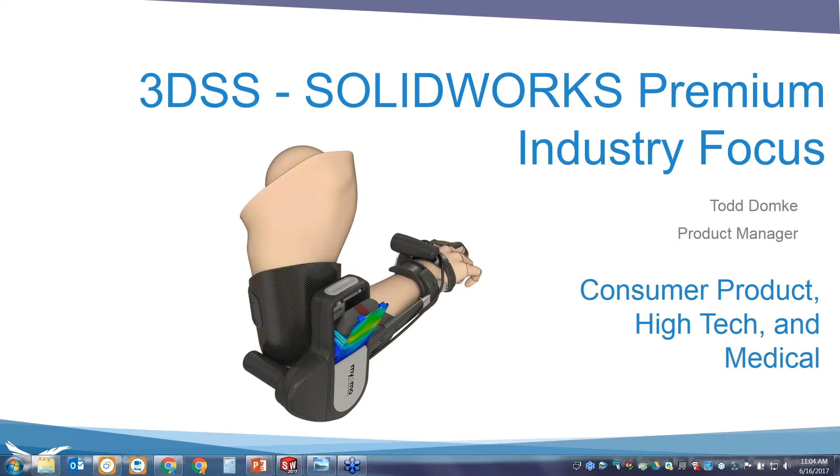You may know this month we've been doing a series of webinars on SOLIDWORKS Premium as the focus, but instead of just listing all the powerful features and productivity tools included in Premium, we're looking at it more in terms of focusing on an industry and how some of those can help you solve specific challenges for that industry. Last week we looked at aerospace, automotive, transportation, and defense, and this week we're looking at consumer products, high tech, and medical. You can go back to the June 9th webinar and get that recording on our website.

And then next week we're doing the same thing for the energy, plant and process, oil and gas, and industrial equipment industries, again looking at how the specific benefits of SOLIDWORKS productivity tools in Premium can help you do your job and get better products out a lot faster.

The reason we're focusing on Premium is because this month, at least while it lasts, is a really good chance to get SOLIDWORKS Premium, better than we've ever seen it before, for the price of SOLIDWORKS Standard. That's really all you need to know. You pay for Standard and you get SOLIDWORKS Premium. You skip SOLIDWORKS Professional and go right to the top, getting the best, most powerful version of SOLIDWORKS. You save a lot of money and get a lot of stuff.

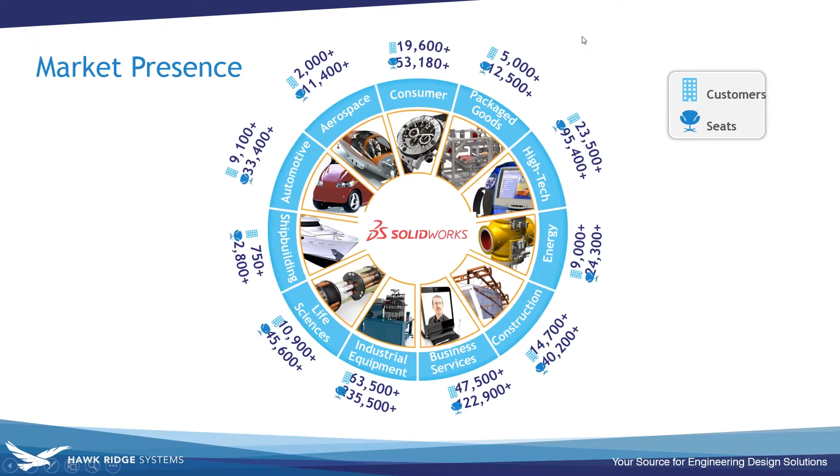Looking at consumer products, what are the specific challenges we have when working in this industry, designing products and getting them to market? There's a big human element in consumer products. Humans buy these products and they interface with these products, so therefore ergonomics and aesthetics are extremely important. Innovation is really important too. Who can come up with the next best idea for a product that helps people or brings people enjoyment? Product innovation is massive here.

There's also short product life cycles. You've got to get them to market extremely quickly, and then there may be a new one coming down the road, so they may not be on the market very long. It's constant reusing of data and improving the product.

Also, offshoring and globalization mean we need to be able to communicate with manufacturers. We may be designing this product but not making it. We may be bringing in other experts and specialists from other parts of the world to help bring this to market, so we need to communicate effectively, not just with emails and screenshots. We need something more than that.

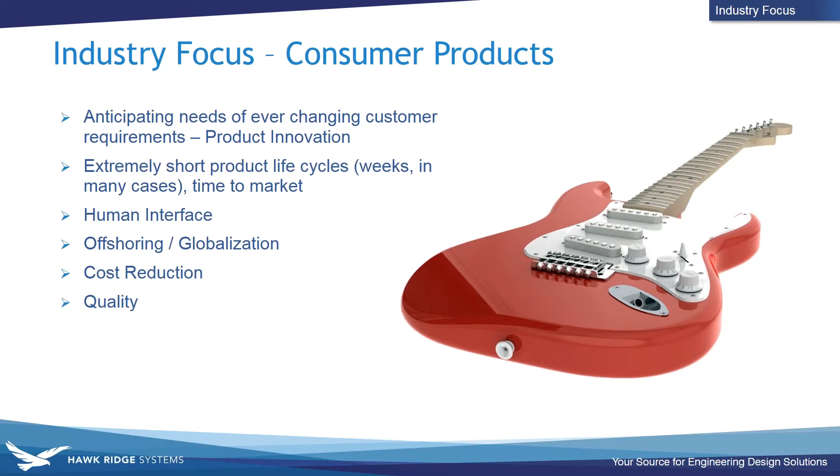Obviously, with a short product life cycle, you don't want some of these products to be too expensive, so we need to be able to develop them a lot cheaper so we can sell them for cheaper. And again, because it's such a close human interface with these products—they're in your hand, on your body—they need to have that feeling of quality because you're so close to it and you see and feel it. So we need to eliminate mistakes and make the quality as high as possible so it gives off that impression for your brand, and so they'll keep looking for you for new products.

Now the consumer products industry itself breaks out in a lot of ways. It could be anywhere from furniture—very low technology, but aesthetics very important—to home and garden, personal and leisure goods. When you get into bicycles and things like that, we need to make sure things aren't going to break; they need to be reliable and predictable. Apparel and jewelry too, and then the last segment here is consumer electronics.

Again, big aesthetics and human interface aspects to these products, but this also focuses more on products that always have some kind of integration of circuit boards or electronics—personal audio and navigation systems, PC peripherals. They all have aesthetic enclosures as well as needing functional electronics on the inside, which means working with different design disciplines and bringing it all together into one product.

Okay, so speaking of aesthetics, let's just jump into the software here. Definitely want to spend a lot of time in the software and a little bit less on the slideshow. So let's go to SOLIDWORKS.

Here's a project we did at Hawk Ridge Systems with our digital manufacturing laboratory where we're doing some 3D printing. We just wanted to scratch the itch and do a little design work to see what we could come up with on a little remote controlled helicopter.

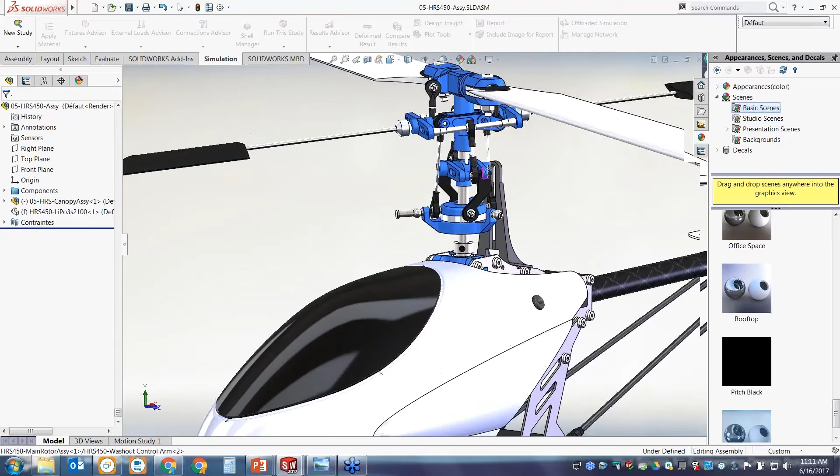Very mechanical complexity, which SOLIDWORKS can always handle. But notice the fuselage there, not many straight lines or radii or anything like that. It's a very organic, very smooth flowing shape.

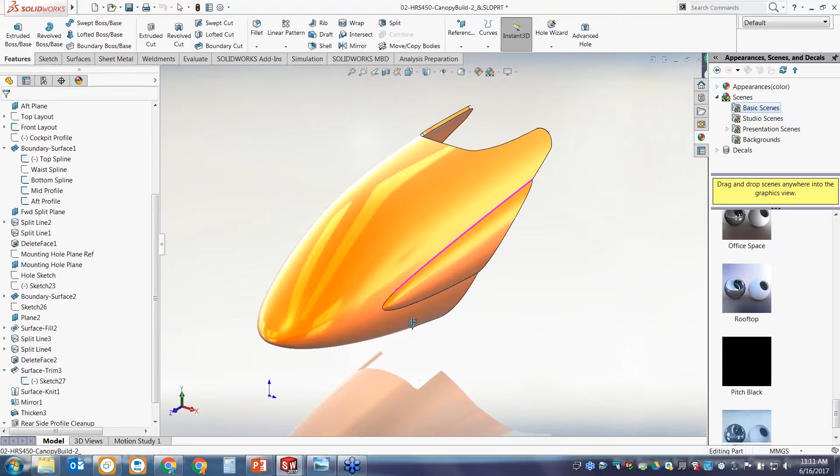So let's look at how we would make something like that in SOLIDWORKS to be able to come up with these types of shapes, aesthetic, reflect light well, and we'll look at how we can evaluate them too.

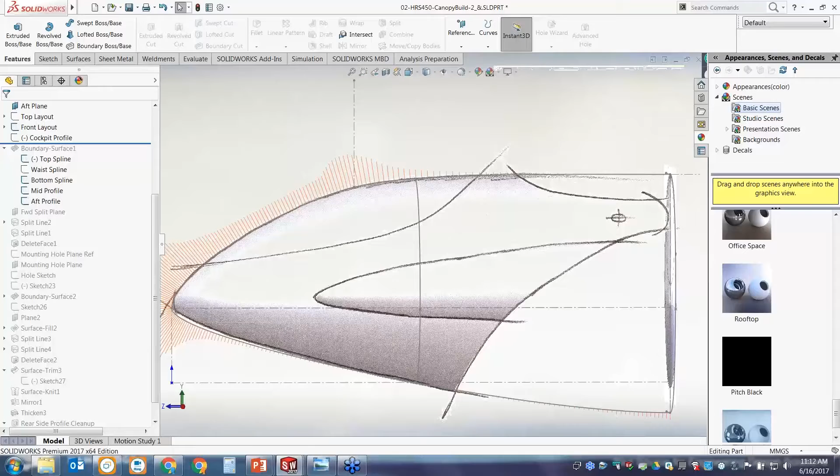If we look at our sketches here, first of all we have some artwork. So now we've placed in some artwork that we know how we want this to look, so we can use this as a reference as we build our 3D model around it. The advantage here is on the creative side, Adobe products like Illustrator, we can bring in that kind of artwork. So if you're already doing that workflow, you don't have to draw anything extra in SOLIDWORKS. You can just bring it right in and start using that to guide our building of this model.

Okay, so for this first surface, again, very smooth, nothing straight about it. How would we build that? So we have a very powerful surface feature here.

Let's just clear it out so you can see how it's created. All right, so we have our scaffolding, or our framework if you will, with several curves and splines. And we can use this curvature combs to make sure things are transitioning smoothly.

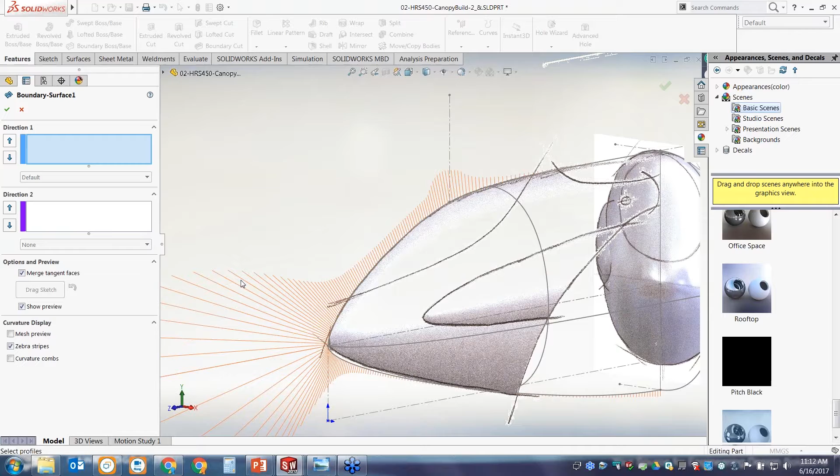I may need to look up in this area a little bit more. Again, it's not ferrying people around, it's just a small little handheld RC helicopter, so as long as it looks good in the light, it's probably okay.

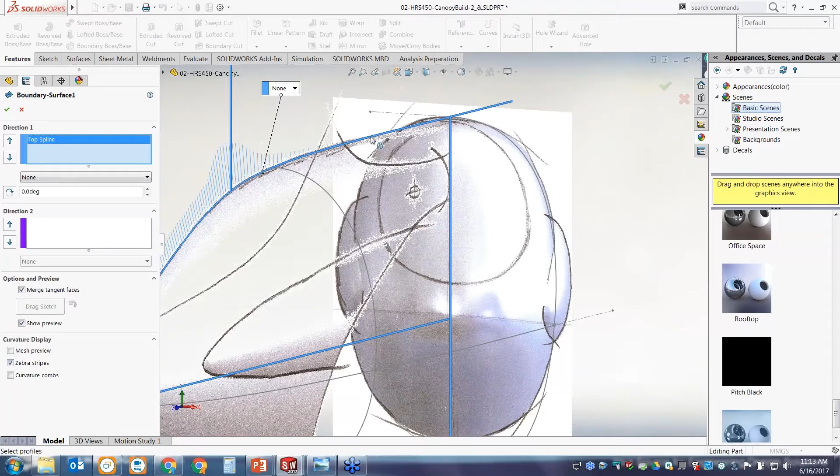But again, using the artwork and then some sketches I've created, a boundary surface works in this method where we pick a curve or a profile, and you can see that it's knitting those two together.

Okay, without any guidance right now, definitely not the shape I'm looking for yet, and we'll bring it down to this bottom one. Okay, so it's starting to take the shape.

Now in the end conditions here of these boundaries, I want to make it normal to the profile. You can see that it kind of has it come out straighter before it starts blending down now, and we're going to do that on both ends.

The middle one's fine, but on the last one we also need it to be normal to profile, because again I'm only making half of the surface, so I need a nice smooth blend over the top onto the other side when I mirror it.

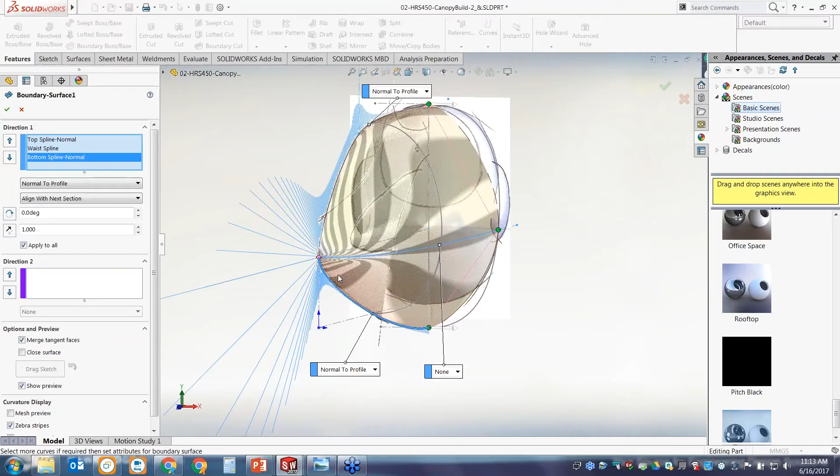Okay, so that's direction one. All of those profiles are going one direction. So now in direction two, I need this curve back here.

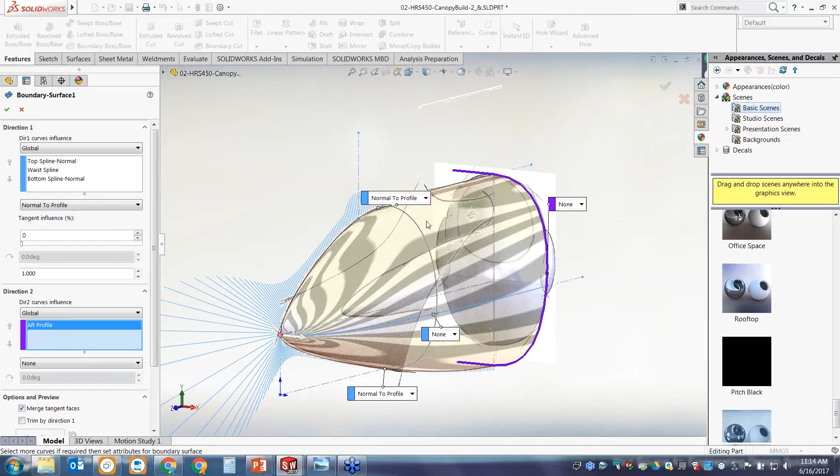And you can see that really affected the shape, and now it gets it to wrap around just the way I want it. Okay, and I have another intermediate profile here, which again further refines the shape, and now I can see the reflection plot, things are flowing nice and smoothly. It looks good. Okay, so that's our first, that's a very powerful feature, but very easy to use also.

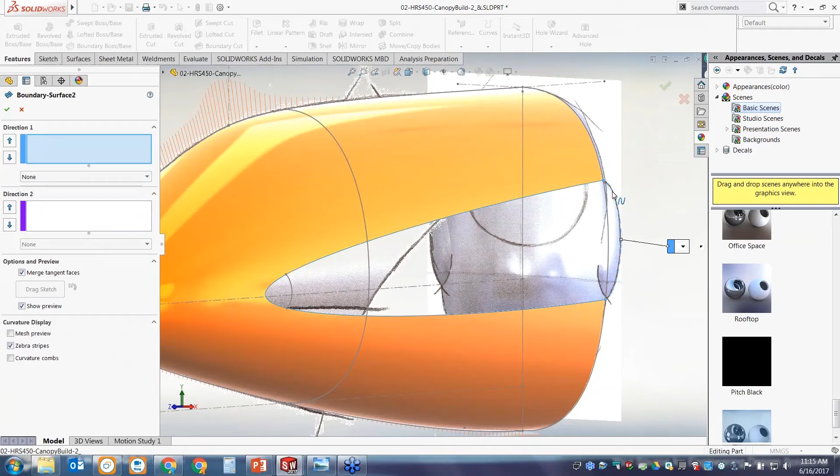Okay, and we'll come down to another area here where we need another one. Okay, so we trimmed out, we cut away a piece of this surface, and now we want to put another kind of inflection out, sticking out of that surface. And again, the way to do that would be to go from one curve to another.

All right, so you can see the shape, but it's not attached to the edges yet. So in direction two, we'll tell that to attach there. Okay, so that's looking good. All right, and you can see that feature coming off of there now.

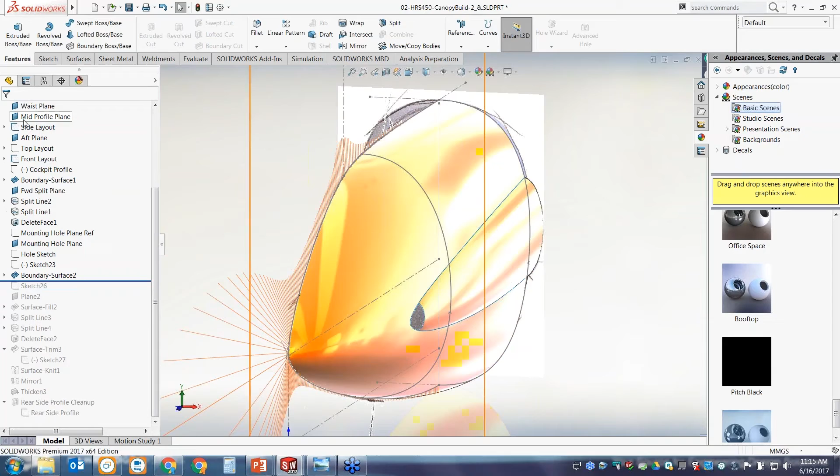All right, so that's another use of a boundary surface, and now we need to get a nice little smooth transition here in this smaller area. So we have another really powerful feature called the fill surface feature.

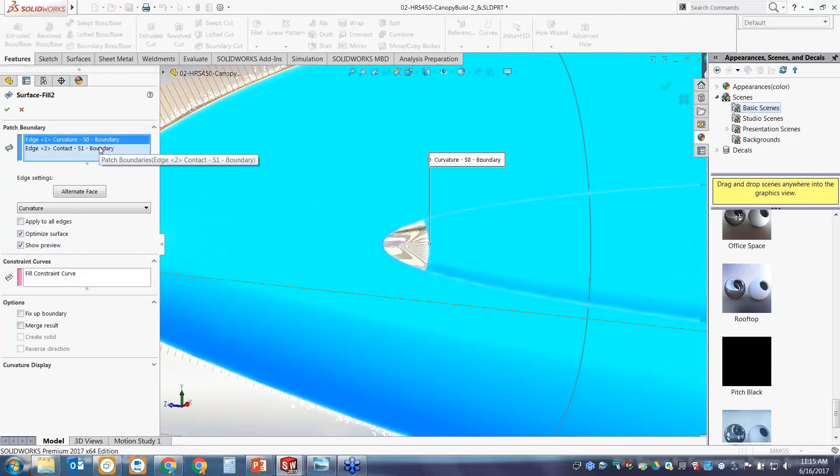All right, so this is when we just have a hole in a surface and I need to put a patch in. We'll go from this edge to this edge, and we'll look at a profile view here so we can see how this feature looks. Well, it's doing what I asked, but that is not very attractive or smooth. So where it meets this boundary, not the one on the fuselage, but the one here on this pontoon...

We'll change it so instead of just straight contact, now we want tangency. You can see how it affected that shape, and now it's flowing smoothly between this one region to the next, although it drops off a little fast. Tangency is tangency, it's mathematic. I don't have a whole lot more control over that.

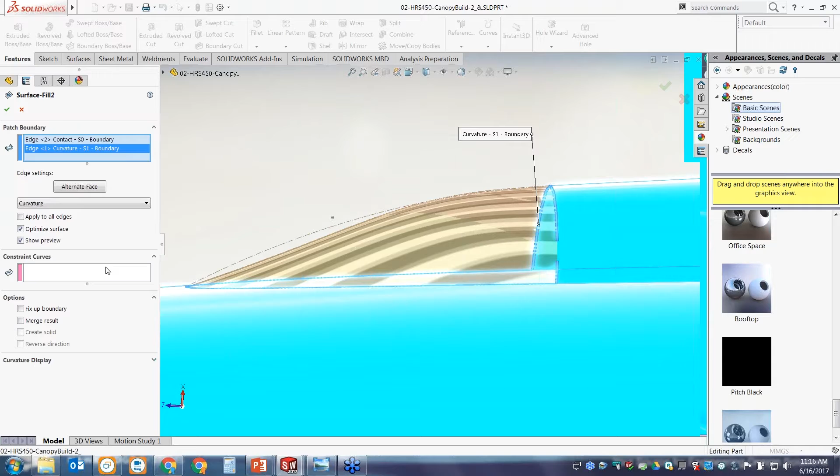So we can also do curvature continuity, which is a more advanced level of mathematics, to continue that curvature and blend it in a more smooth fashion. That's looking better. And we can go even further, because I know it's still kind of dropping off a little fast, and this is the profile I want it to take. So we can put in a sketch and put that into the equation, and now it'll maintain the curvature continuity and follow that contour going down. Powerful stuff, very easy to use.

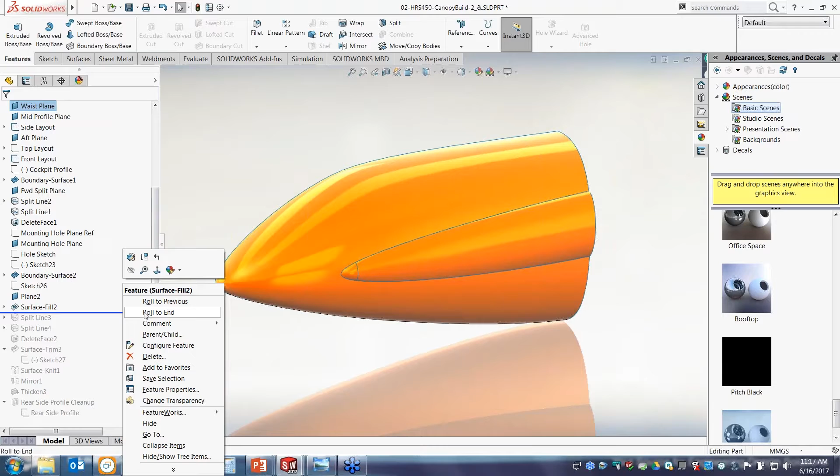And now we can look at, if we roll all the way in, we can evaluate these surfaces with some great tools built in. First one is called zebra stripes, kind of a cute name, but it's just another word for reflection plot. So we can see how this is going to look in the real world. We'll put some vertical stripes on there. We want to make sure everything's flowing smoothly. We have some other things we can do.

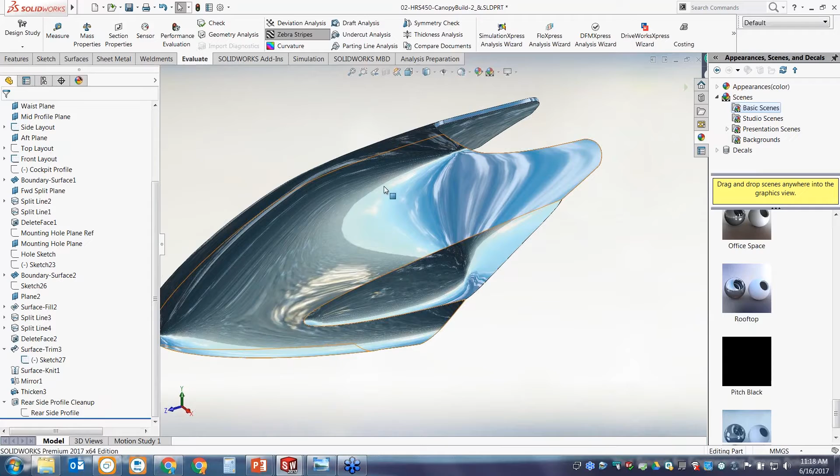We can put an image on there and see how that's flowing too. Again, we're looking for any unattractive inflections in the surface or wrinkles that I may have missed, because in real life that's not going to look very good, and that's what we're trying to avoid. So we can always evaluate what we have before we go to production, to make sure it's what we want.

So that's just a quick little glimpse into, it's a great hybrid multi-body solid surface modeler. A great combination of parametric features for the mechanical parts, great surfacing tools, boundary surface, filled surface, other tools like deform and wrap, and projecting onto complex surfaces, deform, freeform. There are several tools in here to get those really tricky shapes without having to use another piece of software. That's really the idea, we want to do it all in this. SOLIDWORKS Premium is one design solution to get you all the way there with your product.

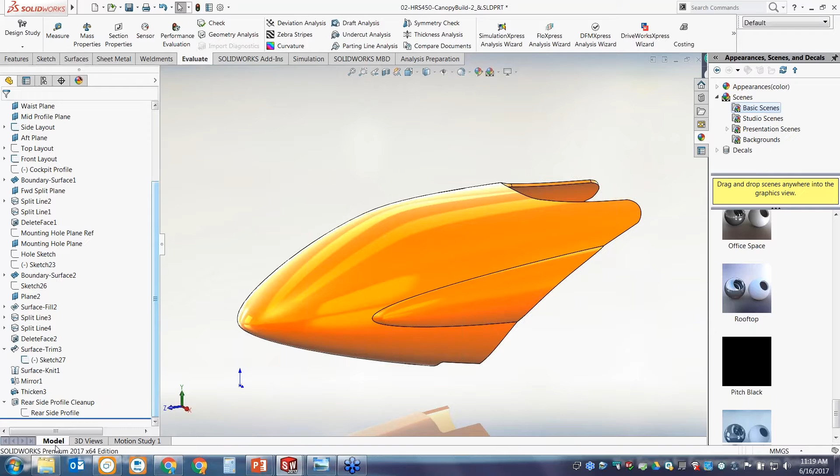All right, let's look into now, speaking of aesthetics, we also need to make sure we want to maybe try some other materials, see what it's going to look like in real life. So let's jump into how we would check that. Again, we need to check it early in the design cycle, so that we can make those aesthetic decisions early rather than later when it costs much more money and takes much more time. So we need to be evaluating this as soon as we get some models.

So let's open up SOLIDWORKS Visualize. This is a standalone product, but included in SOLIDWORKS Professional. But since you would get Premium, it's in there. You get everything in SOLIDWORKS Professional in addition to what's in SOLIDWORKS Premium. Again, it's the highest level, and it gives you everything in the lower versions as well as more.

So when I open my CAD model, let's take a look. First of all, here's what it looks like in SOLIDWORKS. I can see what it is. I think it looks pretty good, not terribly realistic, not a lot of emotion. Doesn't really make me want to have a cup of espresso right now, but again, I get a rough idea. The visualization in 3D CAD software in general is really good.

However, now it comes time to start seeing what it's going to look like under lights in different environments with different materials on it, so that we can start sourcing vendors and materials and start planning early in the design phase what this thing is going to look like. So looking at it in 3D CAD is not going to do it for us. So we open our native SOLIDWORKS model right into SOLIDWORKS Visualize. Again, it uses NVIDIA ray tracing technology, so it's as good as you can get, absolute photographic quality.

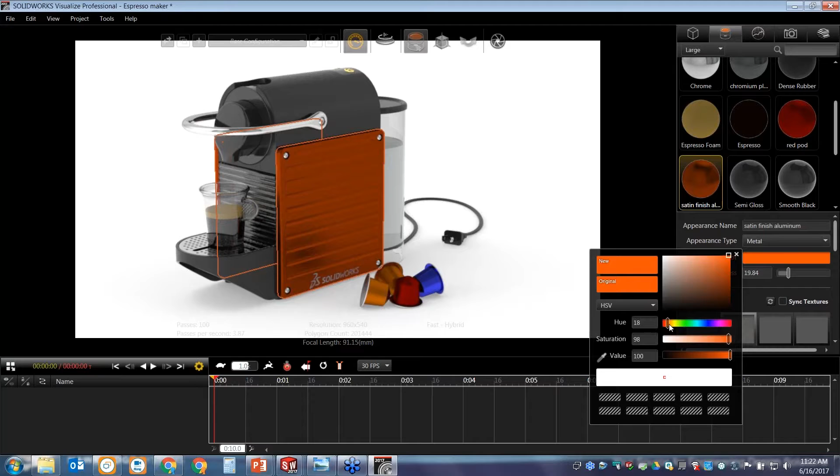Okay, so what we can do is just start trying different colors. First of all, I can select this and start looking at different properties. We can just go right to the color and change that. What if we want to try a little bit of green or teal maybe?

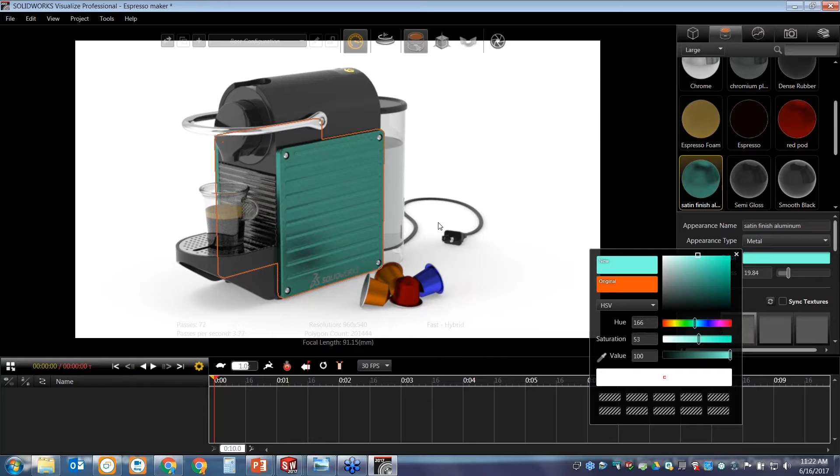Okay, that looks pretty good. Right away we see reflections on it, we can see how things look. You can experiment here all day long rather than having to make these parts and have them photographed. The workflow is like a photographer would do: set up your scene, apply your materials, set up your cameras, and then take your shots.

Okay, if we want to take up the roughness, or reduce and make it smoother, you'll see we'll get a much more accurate reflection in the face here. Maybe we want a little more matte. Again, instantaneously on the screen it's going to render it, and I'm going to see the difference, so I can start making these decisions.

Let's turn down that color a little bit. Okay.

Then we'll go to our scene. We can drag in several different scenes. There's a cloud library you're entitled to, as well as you can put in your own. And you can see when we bring in an environment, it's going to change where the lighting's coming from, the environment that's reflecting onto the model.

Okay, so we just want like a photographic studio here. All right, that looks good.

And now in the scene, I can also change things, background color and the brightness. All of that can be adjusted exactly the way you want it to make sure you're getting what you want without having to hire a photographer. Sorry, photographers.

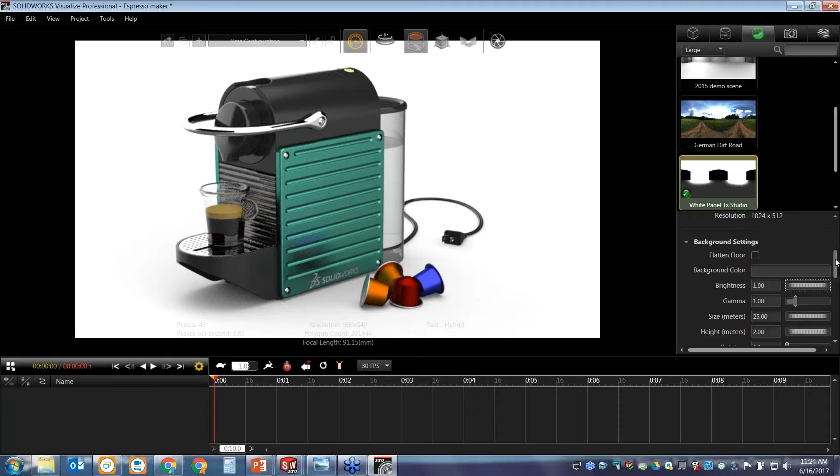All right, that's looking good. Now maybe we would want a camera. Okay, we have one camera on there so far. Maybe we'll put a few because we want several different views, because we want to draw the viewer's eye to certain aspects of the model.

Okay, and there are some post-processing options that really add some emotion and drama to the picture, and you can see how that, by darkening the outside, that vignette effect there, it really draws your eye right to the product and makes you focus on it.

Let's lighten it up a little more. All right, that looks good. Okay, and now we'll copy this and let's do another camera.

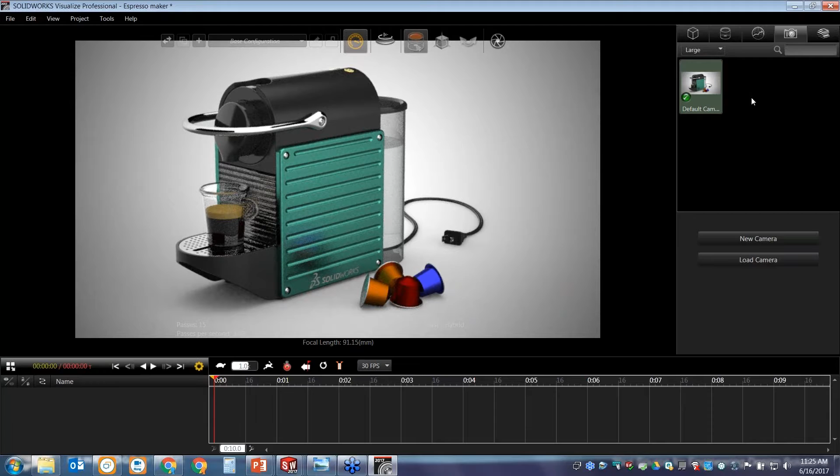Okay, and with this one, we really want to maybe focus on a certain aspect of the model. You notice again, it's rendering real time at all times while I'm doing this, so I always know what things are going to look like.

We can also turn on things like a depth of field. Okay, and now when I just tell it what I want the camera to focus on, that will come into focus and everything else will blur out a little bit. So again, it's kind of my way of forcing the viewer to focus on a certain aspect of the design.

And I can just easily change that. Now we'll go to the drip tray and you can see how that affects it. So now the cup of coffee or espresso is in focus while everything else blurs out a little bit. There's some really high quality effects here that we can use to show this thing off before it's ever produced, before we even have a prototype. We already know what it's going to look like and are making these important decisions early.

Okay, now this is Visualize Standard, which is what's included in SOLIDWORKS Professional. However, if you need different types of outputs, you're going to get the highest quality photographic static outputs from Visualize Standard. If you need more things like special effects and animation, moving, more dynamic outputs, I guess you could call it, there is Visualize Professional. So just know there are two versions of it.

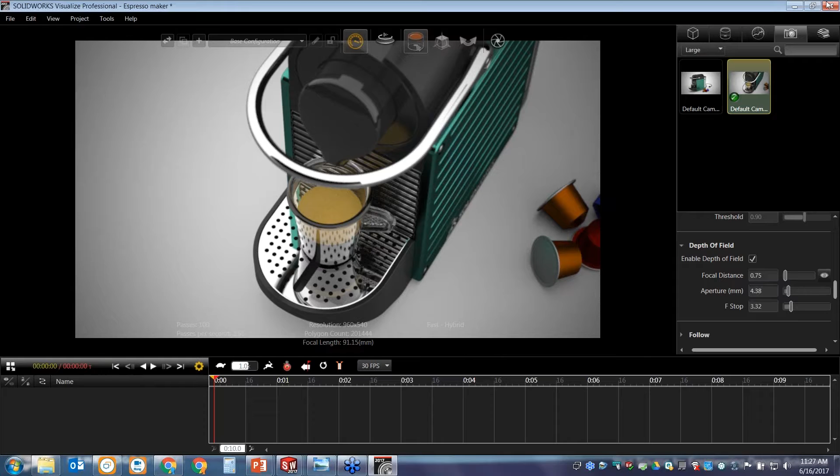You're going to get the standard one with SOLIDWORKS Professional, or Premium too. And then if you need more, there are options to go much further in your visualization, they want to make sure you have just what you need and not more. Just be aware of that. All right. Oh yeah, compared to that, night and day.

All right, one last thing here. We're talking about product reliability and predictability, especially on things that are going to be in a rougher environment. But with consumer products, there can be lots of different environments. So we have lots of customers who are bicycle accessory or full-blown bicycle manufacturers.

And we can't have stuff breaking. So how would that work here? With SOLIDWORKS simulation, we can go in and do some virtual testing so we know ahead of time if we need to make design changes before we make a prototype. We don't want to make a prototype, find out the mistakes, and then make another prototype. We're trying to figure out those mistakes as early as possible, when we just have 3D models and haven't spent a lot of money on prototypes yet.

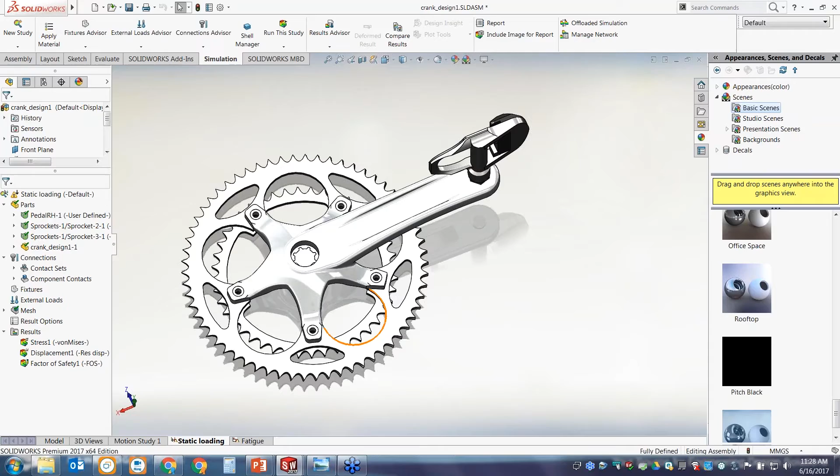Okay, so the way this would set up, let's do a simple one here. This is a pedal and a crank and sprocket assembly. They want to go worst case scenario — what if we get someone really big and strong with a really big power stroke? We need it to be light, but not too light, obviously. We can't have these things breaking, so we need to know up front if our shape is correct for the loads it's going to be seeing.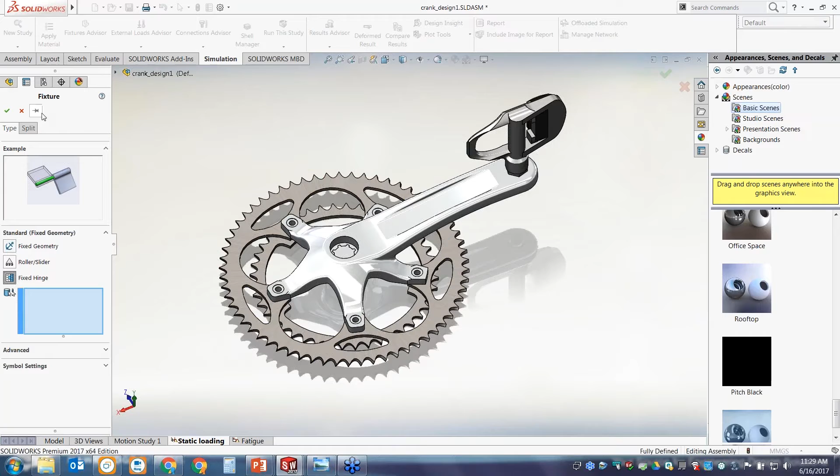So the way we would set this up — we'll do a pretty simple one here, but you can get even more advanced. We need to restrain where the fasteners would hold the crank to the sprocket, and we also need to do this hub here. So we're just telling it that can't move, which is the way it would be in its operating environment. Okay, so it's restrained accurately.

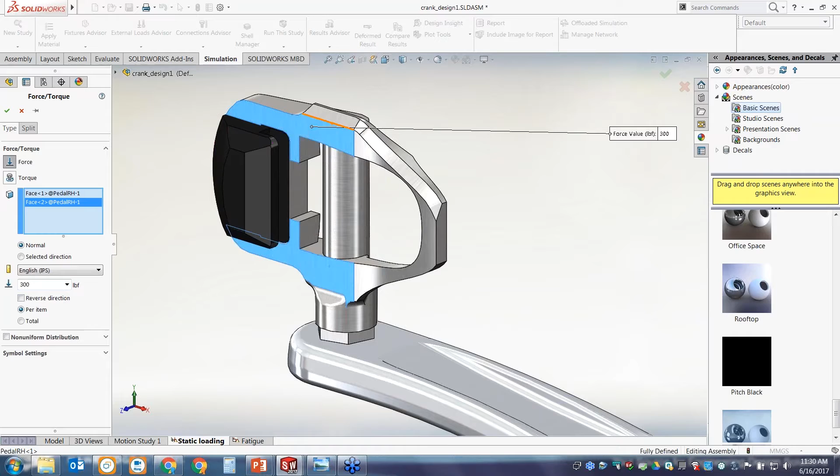Now we need to apply a force, or else what are we doing here? All right, so let's do 300 pound-force, and it's going to be applied right on these two faces of the pedal, normal to it — worst case scenario, straight down on it. We're going to spread it out over both faces, so that's the total force on all those faces. All right, so we have a load, we are restrained so it can't go flying off into space, and now we just need to run the study.

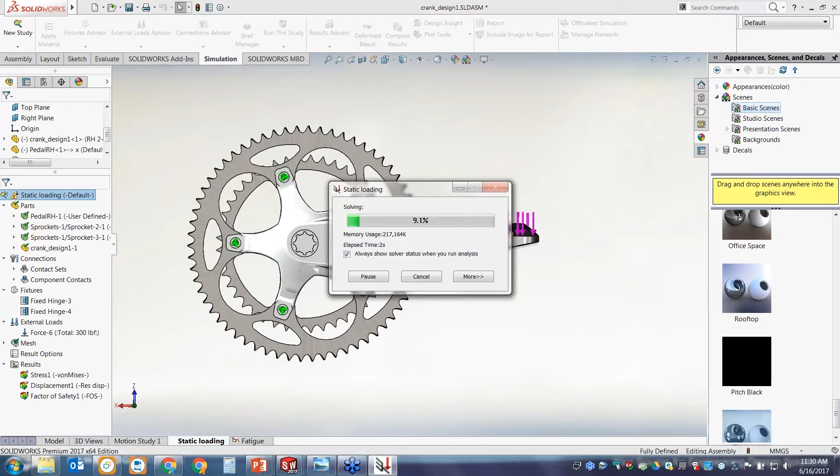And this is what computers are for. They're crunching tens of thousands of equations right now to figure out what's going to happen when this load is applied to this 3D model. And right away we get a stress plot. Okay, looks like the worst thing in there is almost about 40 KSI.

Okay, so we would compare that now. This crank is made of 6061 heat-treated aluminum, so we would want to compare that to the yield strength of that material. We also get a lot of deformation there — we can see it's going to cause a twist in the crank, which we would expect. It's obviously not going to be that much; the deformation scale is exaggerated because if it's very small, you may not notice it. So they really want you to be able to visualize it.

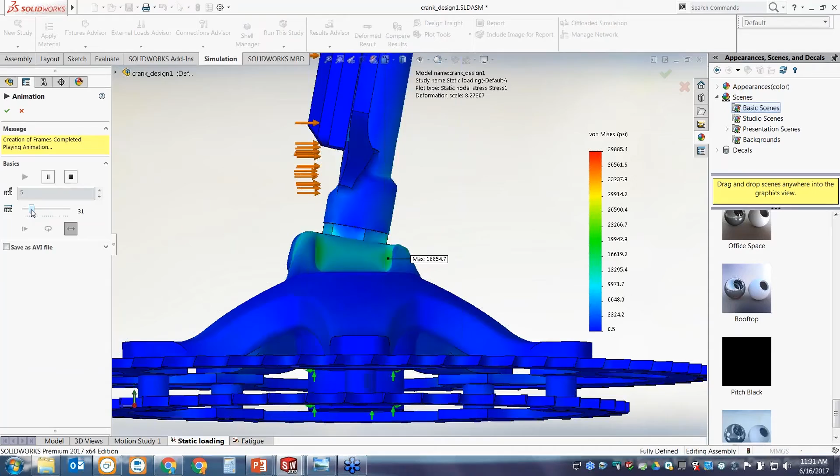And then we can animate that so we can really see how it moves and how that stress builds up. Great insight into your model. We can get some other plots, like a displacement — maybe it's not breaking, but it is going to flex. We need to know how much. So it looks like about 0.16 inches. For other products, maybe you just want to know it's going to move that much, and we don't want to have anything too close to it, even though it's not failing. So again, some great insight into your product.

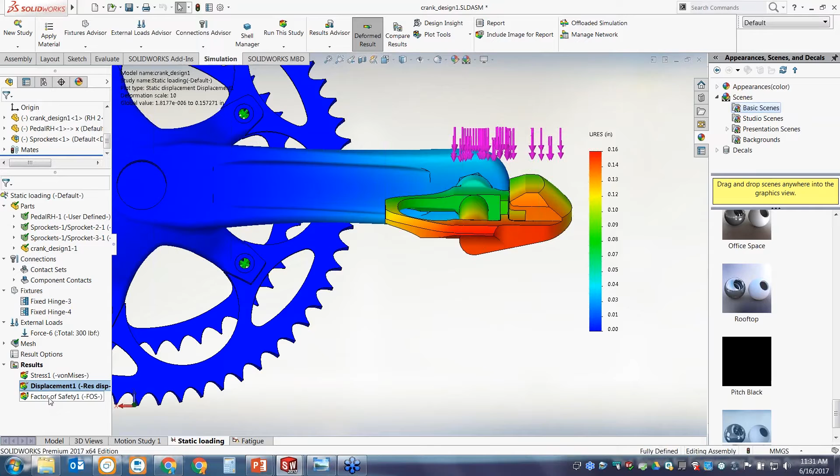And the last one here, this is what's going to really tell us something — a factor of safety plot. Right away I want to know, what's the minimum? Hopefully it's not less than 1. Unfortunately, though, it's really close to 1. So no, it's not failing after one stroke, however, that's really close, and so we might want to look at beefing it up a little bit.

What's nice about SOLIDWORKS simulation is that you get the linear static stress testing in SOLIDWORKS Premium, but you can always upgrade your simulation to do much more complex tests like drop tests, vibrations, non-linear for your plastic parts. Fatigue would be one I would do here — now that we have the load, I would want to repeat that over several thousands of cycles to see if we're going to have issues down the road. And that's something that can also be done with the higher levels of simulation.

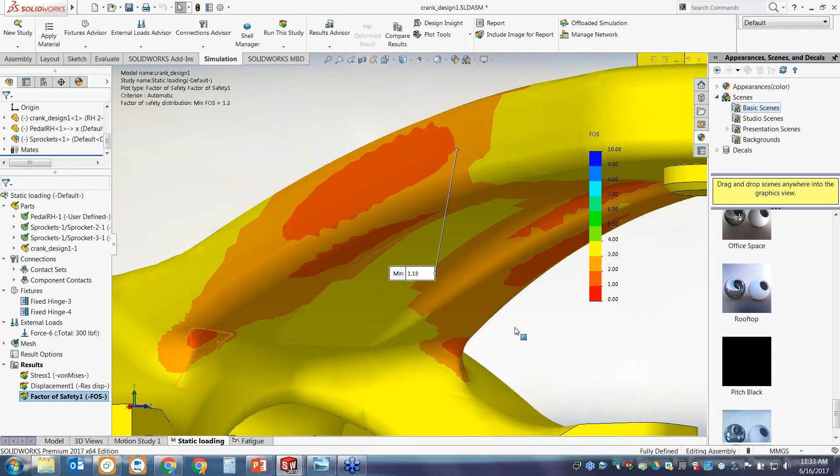So again, you can always find how you can improve your product early on. A great plot here tells us everything is yellow mostly, so we're in about the 3 to 4, which makes me very happy. However, right there in the crank, we might have removed a little too much material, so at least I know now. Maybe I'll add a little bit back in and run another study and see how that improves it — is it worth the increased weight, or do we need to look at some other things? Maybe I can beef up these fillets down here, just put a little more material in there. But again, really nice insight into the model, so I know I can start making some design decisions very, very early. And that's really what the key is here.

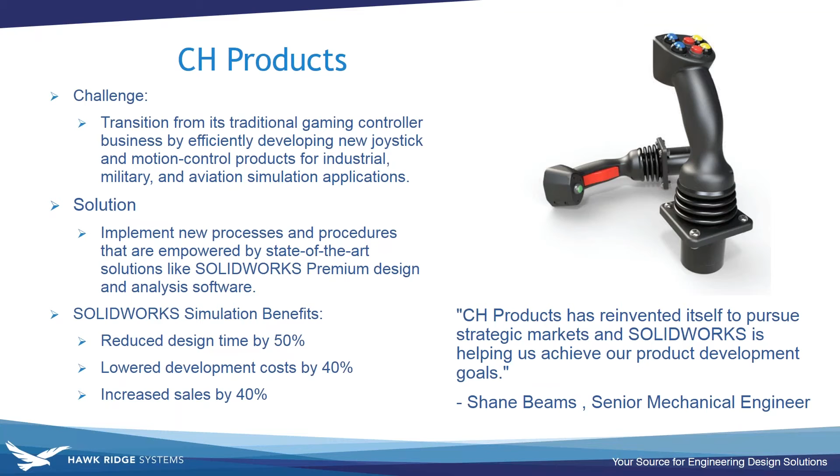So now the high-tech industry is kind of a sub-industry, or we're treating it here because, again, we only got three Fridays to do this and not 12, one for every industry. Grouping these together because, again, the challenges are very, very similar, if not almost the same. In high tech, again, we're talking more consumer electronics, so still handheld devices, however, with electronics.

Okay, some trends we're seeing here: lots of packaging is getting much more dense, things are becoming smaller. As things get smaller, cooling becomes more of a problem, so that's where SOLIDWORKS simulation, again at the higher levels, can do fluid flow testing as well as electronic cooling.

Always a focus on aesthetics and the short design life cycle again. And we're seeing things, as they get smaller and smaller, in wearable technology now. With a short life cycle, we need to pay attention to not only what materials are used, what manufacturing methods and shipping methods are used to get the product out there, but what happens to it at the end of its life. Knowing that early on may help us make some different material or manufacturing choices to help reduce the impact on the environment.

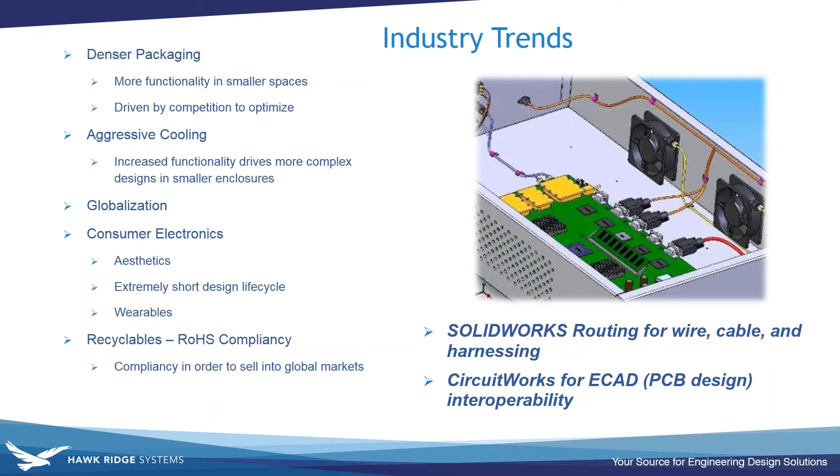We need that in our mechanical assembly so we can do some checks early on. Again, we need to find out if there's problems early rather than after we're making a prototype. So let's look at CircuitWorks. How does that work?

So again, CircuitWorks is going to allow us to bring in ECAD files through a neutral format. It's going to allow us to prepare it, and then it's going to help us build a 3D assembly of that circuit board, which is what we need to do all these checks we're talking about in our assembly.

All right, so it starts with, we're just going to open an ECAD file, which right off the bat used to be a big problem. So we can now open these types of files.

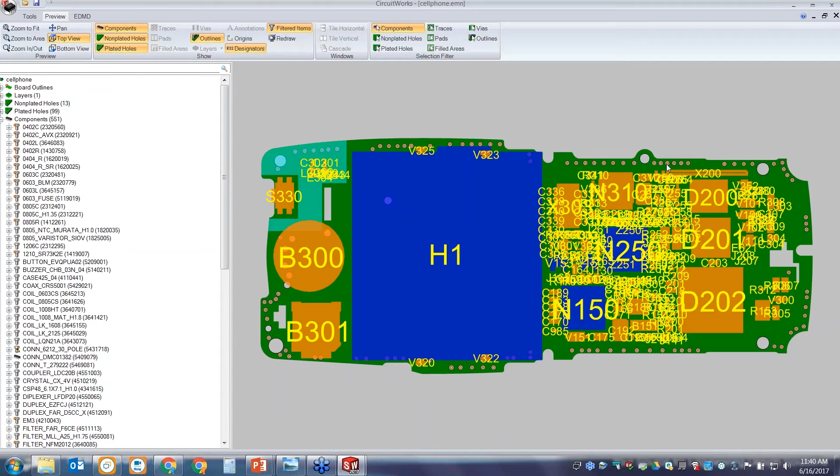Okay, it's an EMN file. Now, this is not the model. This is CircuitWorks previewing the file and allowing us to prepare it before we bring it into our 3D assembly, into our SolidWorks assembly.

So again, you can see we've got a full preview of the model, designators, all components, holes, plated holes, the board, everything is there, and we control what we want to see. If we don't need the designators right now, we can just turn those off. We don't need to see those. We can see the bottom of the board. Okay, so this board has components on both sides.

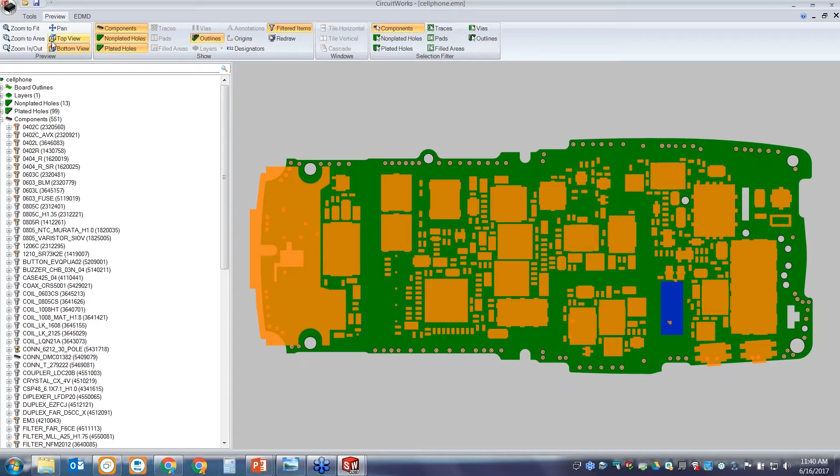We can also filter out vias and traces and other things in there. But again, we're just looking at it and telling it how we want to bring this model in right now. Okay, outlines like a keep out area here, this green top corner.

All right, so before we get ready, let's filter out. First of all, as you can see, there's zillions of tiny transistors. Okay, that is really important for the circuit board designer. It's not that important for me in my assembly. I don't need all 10,000 of those tiny little components that aren't that relevant to what I'm doing. I'll probably need most of the big ones, but I really don't need every tiny one.

So a nice way to help performance and to just unclutter the model is I can filter out components based on different parameters. This one I'll go just everything that's shorter than 1 millimeter. That's a really small component.

And as soon as I enter that value, you can see the preview changes and they kind of ghost out all those really small, more insignificant components. So those will not be built in the 3D model, which is what I want. I don't need all those.

Maybe outline, I don't need the keep out area too. Okay, so now that's gone. But that could come in as a model, so then I know I cannot have any of my enclosure in that area. So again, it's a great way to see that information and use it regardless of which design discipline you're in.

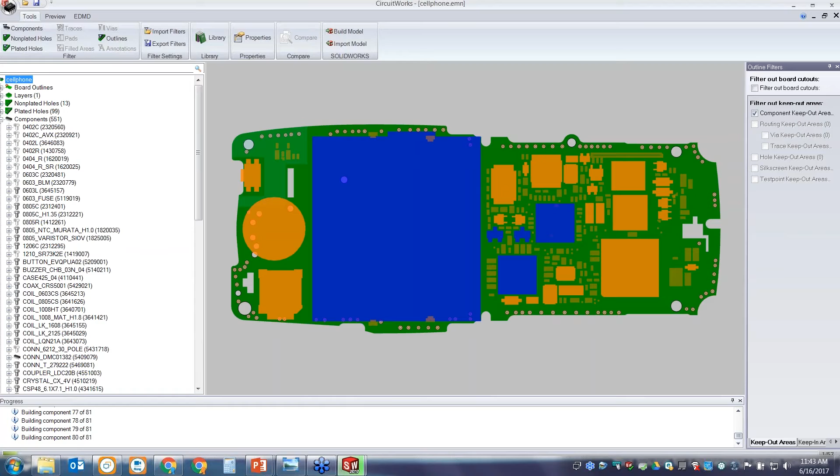Some other advantages with this are that once we have this 3D assembly, okay, so with the board component and the display component and the battery component and the chips, they're all actual individual components that are built. And now it's building it in SolidWorks.

So some advantages here, I'm now going to have an accurate 3D assembly which has mass and volume, individual components which can be moved around,

and there it is. So it just took an ECAD file from Altium or some other PCB design program, and then now I have, from there, I have a 3D assembly in SolidWorks.

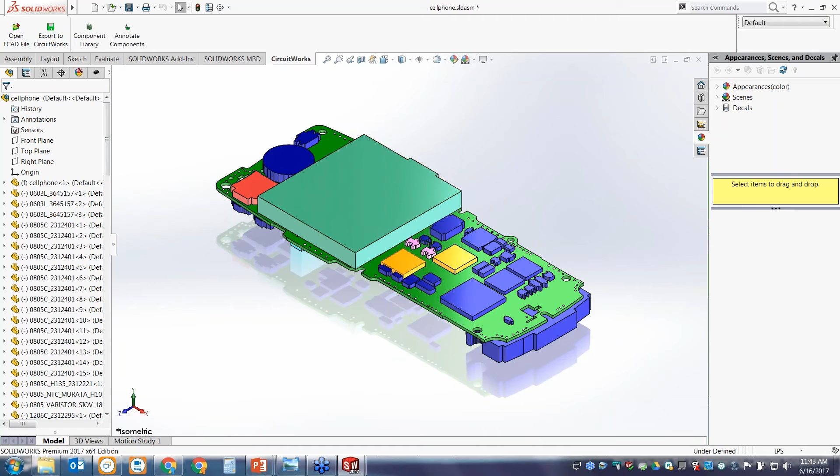And now this can be mated into my enclosure to check for fit and finish. An advantage of having individual components is now with simulation, I can put a heat power source on the chips, and then I can see how things heat up, make sure we're not too tight, make sure we have adequate cooling. Okay, that's really hard to do without this.

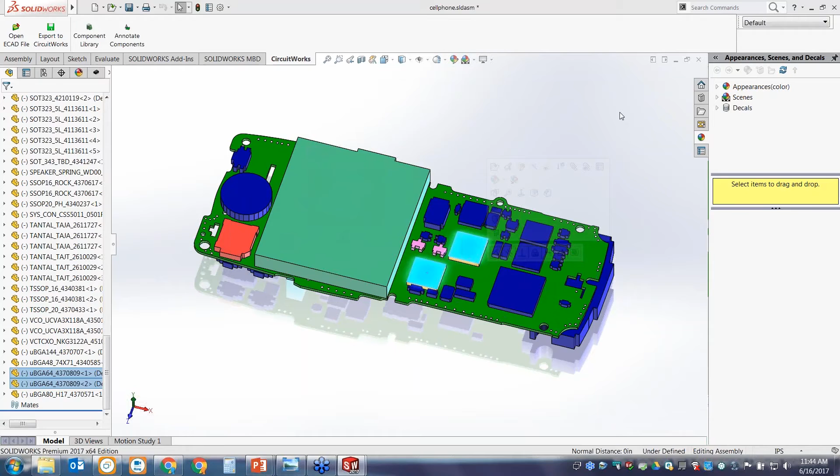Another thing we can do is, again, consult your PCB designer before you do any of this, but if we wanted to, I can delete those components. And now I can take another component and move it around.

Okay, just to give you an idea. Let's say because of the design, aesthetic requirements or some kind of requirement on the enclosure, this component has to be moved over here, and I want to convey that to the board designer. Okay, instead of a screenshot and scribbling notes, I want to be able to show them that.

So with this, I can make the change to the SolidWorks assembly, and then when I export it back to CircuitWorks, I've got a nice comparison here. Let's turn the designators on so we can see those.

There we are. You can see that B300, the buzzer, has definitely moved from version 1 to my new version. Now I'm sending an IDF file from SOLIDWORKS back out through CircuitWorks and back to the circuit board designer so they can see that information and see what changes are necessary.

It's not just about allowing you to open a circuit board. Standard SOLIDWORKS can do that. It'll create the board as one single part so you can check your fit and finish. But if you want to do more advanced things, it's not going to get you there.

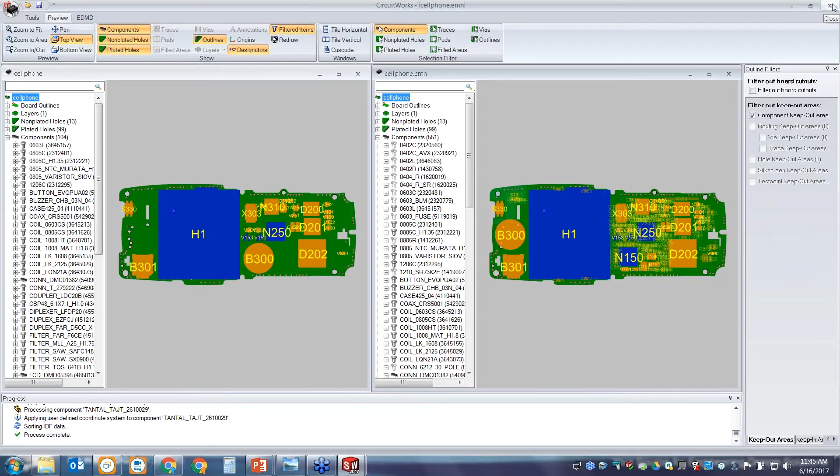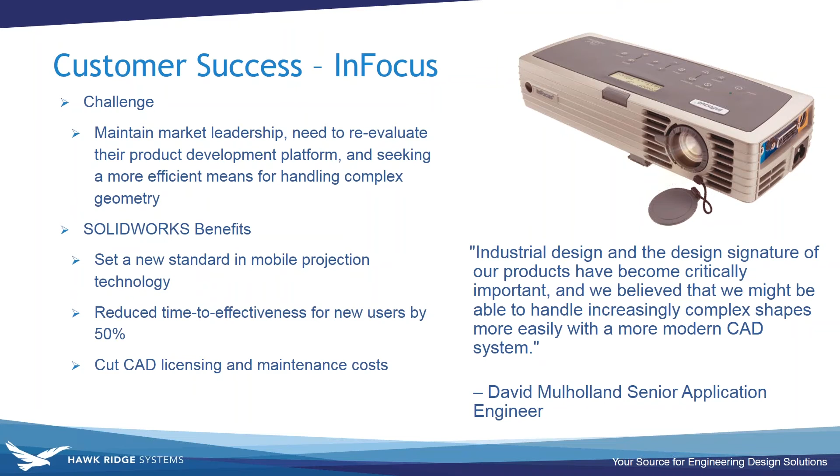So they needed the modeling tools in SOLIDWORKS, but as you can imagine, cooling on these products is a challenge - they're trying to make them smaller and smaller, with brighter lamps for more clarity. That means lots of heat, so SOLIDWORKS Simulation helps them there too. And you can imagine there's some circuit boards in there for the controls.

The last sub-segment here is the medical industry. Again, they share many of the same issues. It needs a kind of aesthetic design language, a soft, unassuming, non-threatening design language. So we need lots of smooth surfaces to psychologically put customers at ease. Aesthetics are huge.

There are definitely electronics in here. Some things they need to think about, though, are regulations and compliance. The FDA doesn't just let anybody come up with a medical product and throw it on the market - there's lots of compliance. You need to be able to document your complete design cycle with revision control, data management, and workflows.

That's where SOLIDWORKS PDM comes in. SOLIDWORKS PDM Standard is included in SOLIDWORKS Professional, which you would obviously get with SOLIDWORKS Premium. So that kind of data management system, secure vaulting, revision control, and workflow can help you meet those requirements.

Some of the challenges here are patient safety. These medical device manufacturers are exposed to a lot of liability, and so they absolutely need to do as much virtual testing as possible to make sure their products are going to work as expected. SOLIDWORKS Simulation helps there too.

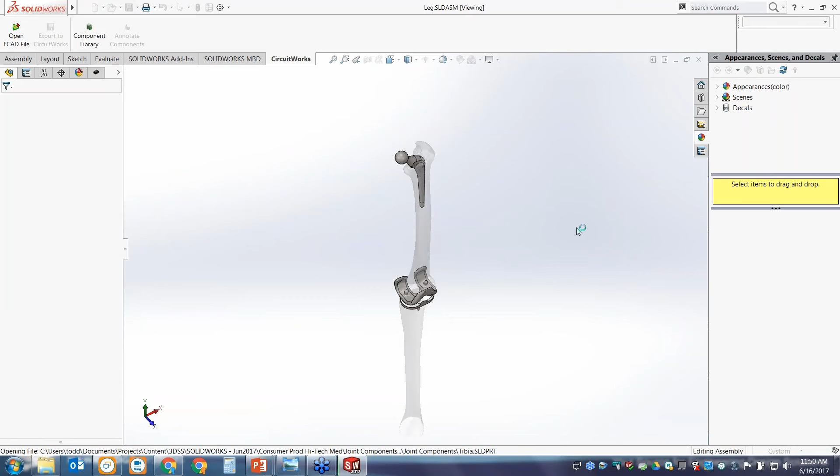Let's look at what that would look like here. So these are some internal prosthetic devices - artificial hip and knee, all in one model here.

But the key is we were able to bring in the scan of a femur and a tibia, which I wouldn't wish anyone to have to draw. This is what Scan to 3D allows us to do.

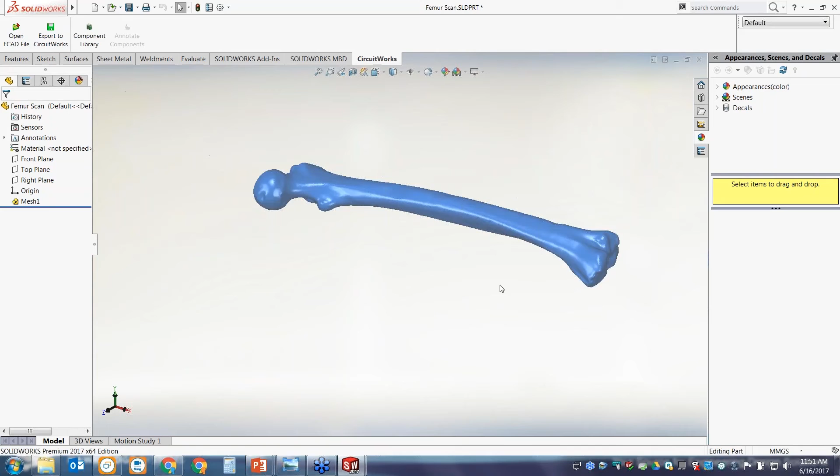It allows us to bring in those point cloud and mesh files that are either created in other programs or are the result of some kind of scan, giving you point cloud files, and then we can turn those into solid models. Imagine trying to draw this - no thanks. So we can just bring it right in as long as we can get that scan file or a mesh file.

And then we can use that to integrate some of our other designs. With our assembly motion, we can make sure things are going to move the way we expect them to. So we can integrate the mechanical right into the human body here with this. Pretty impressive.

Okay, no other way to get those kind of parts in there. And no one has the time to try to draw things like that.

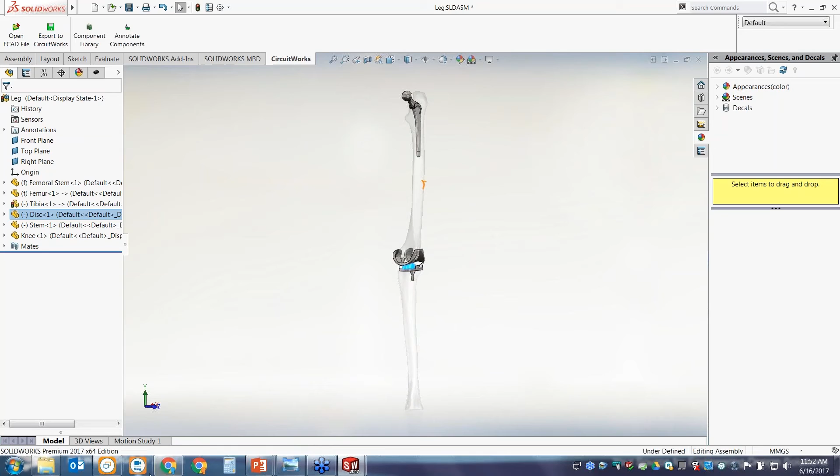All right, getting towards the end, let's look at one more customer and case study here.

I started a guitar company because I love guitars and I had an affinity for making them. If I walked into a music store and played, everybody ran. If I opened a case of something I made, I'd draw a crowd. My name is Paul Smith, and I'm the managing general partner here at PRS Guitars.

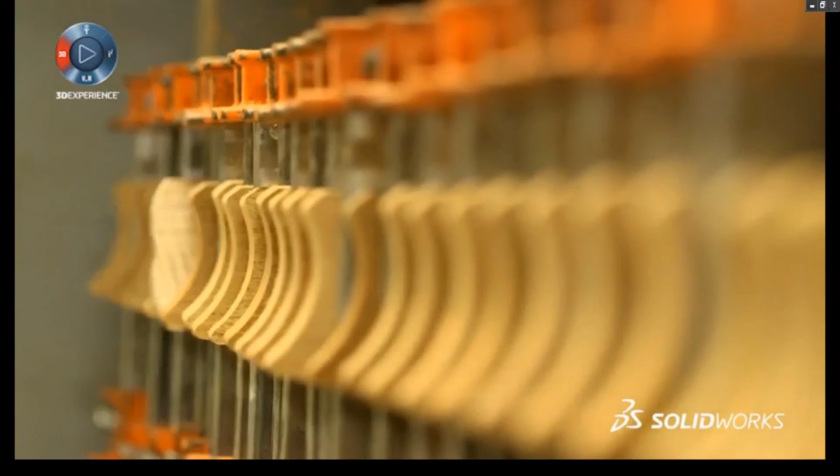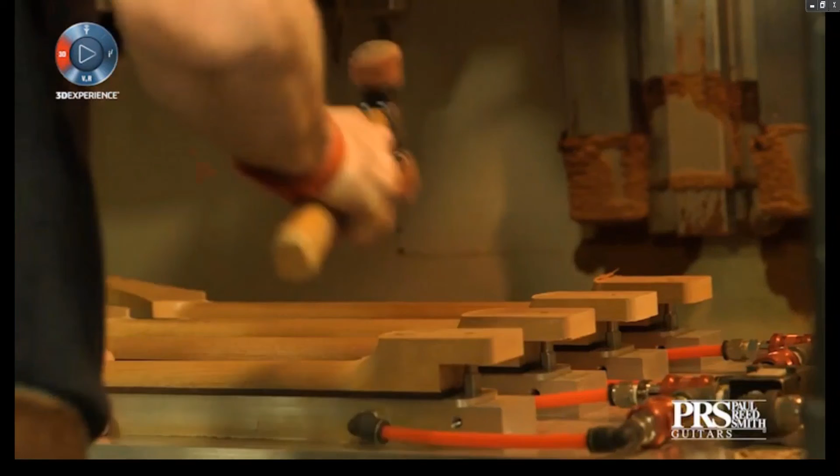I see technology as tools. I think technology mixes with this kind of craft extraordinarily. We can draw a neck in 3D and look at any dimension inside a computer now, and it came originally from what I hand carved, but now it's in a computer model and we can play with it. If I want to make it two 30-seconds thinner front to back and keep the general carve that I did by hand 10 years ago, no problem. If we want to draw something that's half a thou, we can do it. It all works. So for us, SolidWorks is core technology for this business.

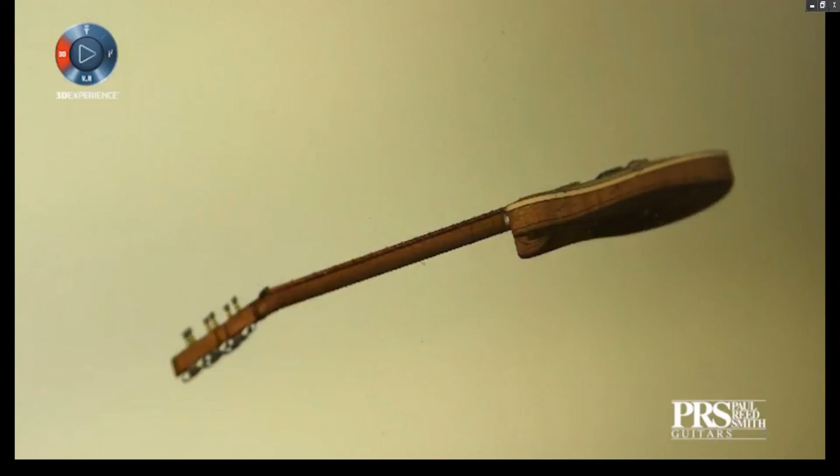Paul is a very visual person. He's not shy to try something new. He sees something, and he can see a change, and he can almost feel it by looking at it. So this allows him to get where he wants to faster and get something more accurate and more representative of what his desired product would be.

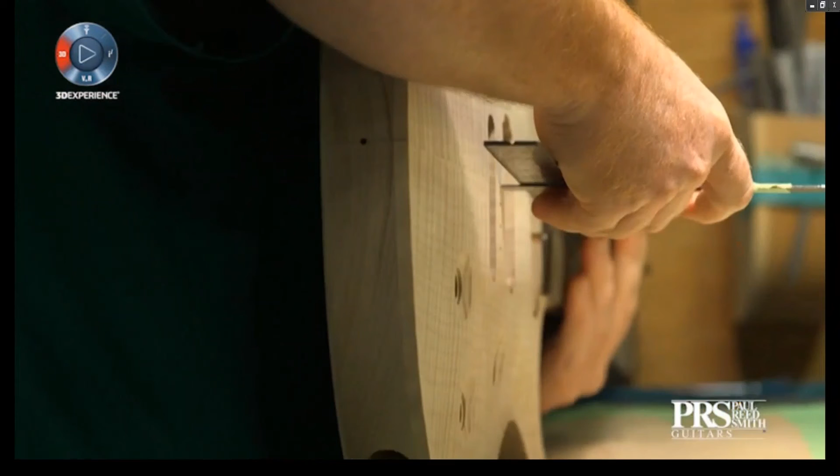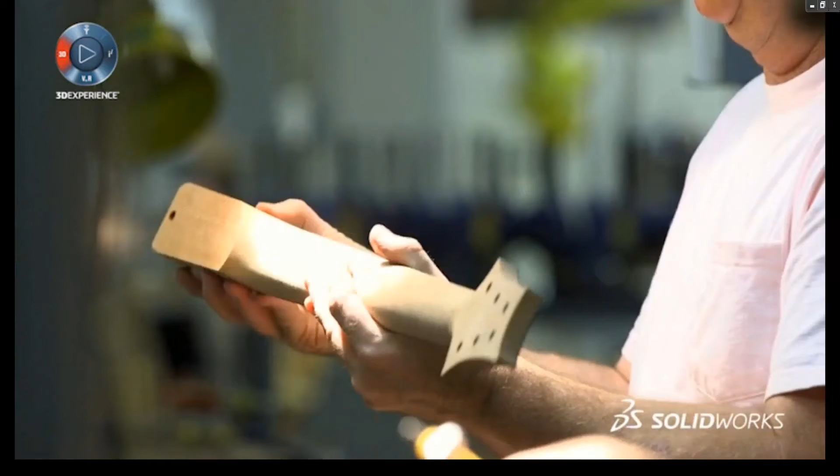Some of the challenges in designing a neck are tweaking the curves to get the smoothest finish that you can. So we'll start with curves to create the surface of the neck, and we use some of the features in SolidWorks to ensure that those curves are smooth. And then once we make a prototype of the neck, we'll take it down to the sanders and get them to feel it and tell us if there's any bumps or issues in it, and then we can go back to the computer and quickly take those issues out.

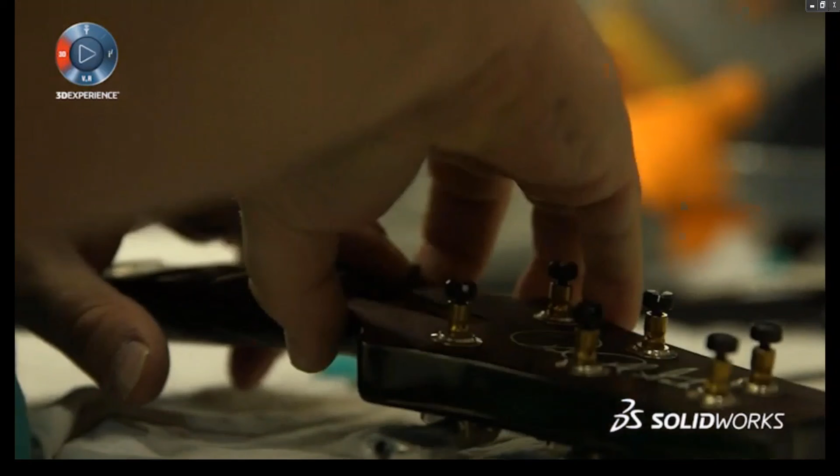For us, SolidWorks has changed the speed at which we do business. How fast we can design something we've thought of, how fast we can get an SLA of that part, how fast we can cut the part out downstairs, how fast the artist can get the instrument. We used to take months and weeks to go from concept on a piece of paper or some hand sketch drawing to now doing full design work inside of SolidWorks. So for us, SolidWorks is one of those tools that we use to compete. Speed and accuracy and art-to-product time cut way down.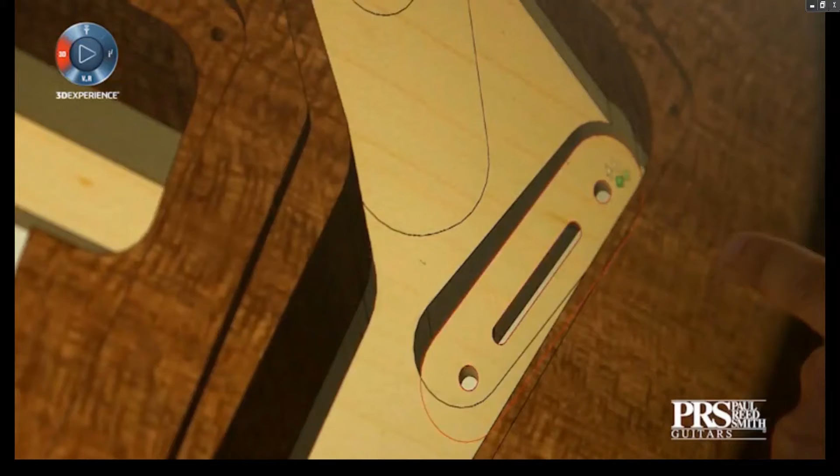Seeing someone's excitement when they get their hands on something that they just couldn't put down, that is something that motivates us to just keep going. We want someone to pick it up and fall in love with it instantly. So knowing that we're a part of that is great, and that there's a little bit of everybody here at PRS in the instrument. There's a consistency that's brought with these new technologies that I really, really like.

So SolidWorks is a piece of that train. It works. I mean, in the end, it doesn't matter what you want, you want a tool that works. It does a job that you can do new things with that you never imagined.

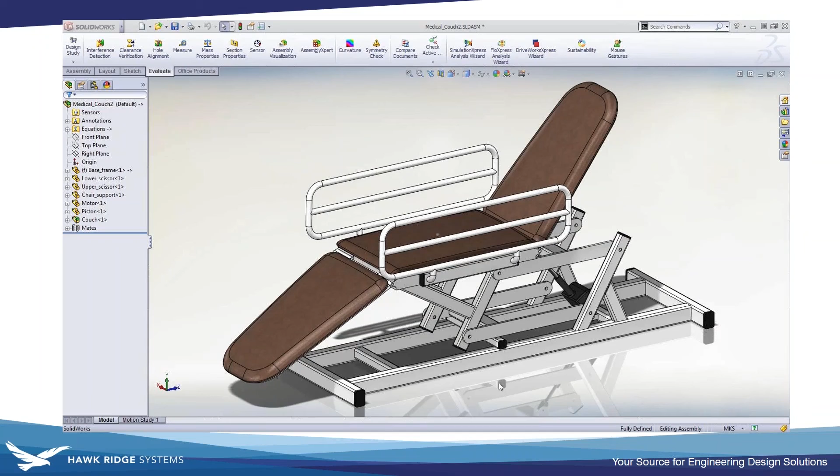Just so everyone's clear, we'll go quickly through what is in SOLIDWORKS Standard, Professional, and Premium, so you get a good idea of what's in this top-level package. Every version of SOLIDWORKS has all the modeling tools you need, the sheet metal specific, surfacing, weldments. They have all these in there already.

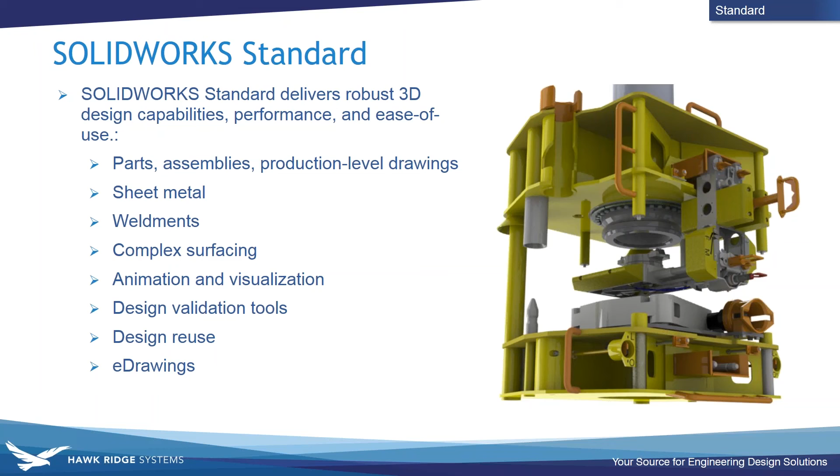Professional adds some productivity tools, like file management, a components parts library if you use a lot of hardware. You don't have to draw all those components. It comes with a library of over 1 million parts, like nuts, bolts, washers, and other standardized components that aren't going to change, so you don't need to waste your time drawing them.

eDrawings Professional allows you to send non-CAD users 3D models so they can be viewed, marked up, and measured from different locations. That's extremely handy.

Professional includes CircuitWorks, which we were looking at, and a cost estimation tool built in for automating that process instead of using spreadsheets.

CAD standards checking checks your drawings for you rather than you doing it one by one. Tolerance analysis lets you see where you can tighten up some tolerances and loosen others to save money while still having your product perform. And ScanTo3D, as mentioned, brings in extremely organic shapes either from mesh modelers or from scanned point cloud files.

Don't forget visualization. That's huge for this industry. It's an absolute must, not optional.

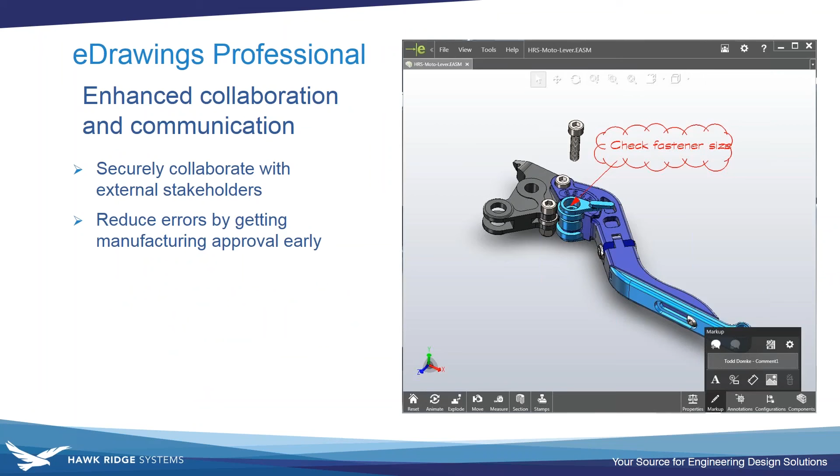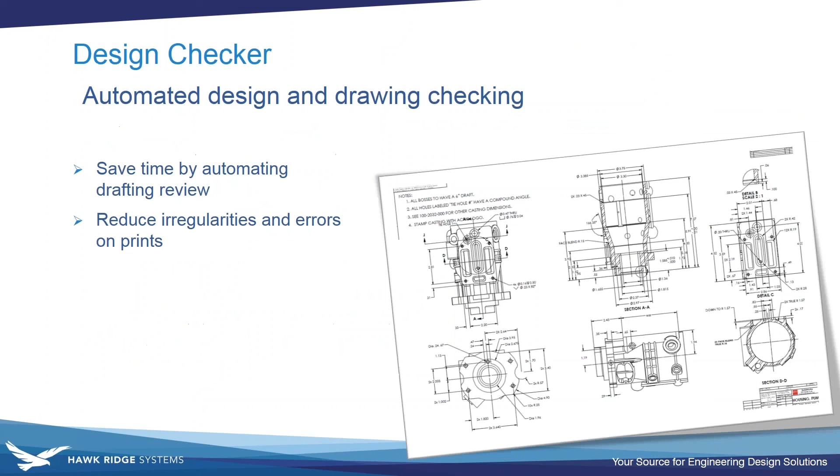Again, design checker: rather than going annotation by annotation in every view and every drawing, you set up your standards and SOLIDWORKS will check those against your rules and make the corrections for you.

Task Scheduler allows you to batch commands. So if you want to print 50 drawings in a folder, you can set it to do that after you leave, instead of wasting your own precious time opening each drawing one by one to print them. There's a long list of tasks that can be done with batch processing. It's a complete productivity booster.

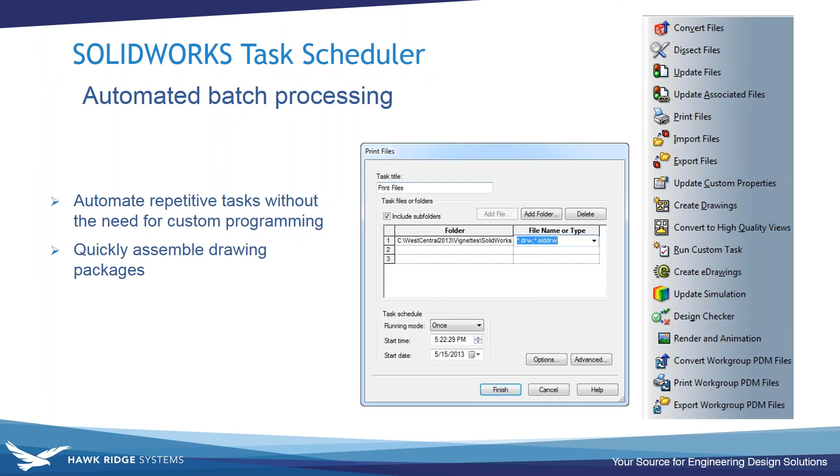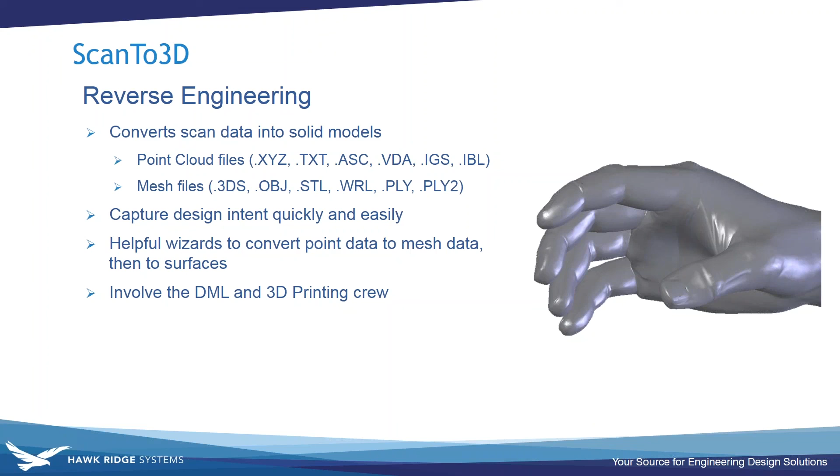Automation lets you focus more on your design and engineering. Tolerance analysis, as mentioned, and scan to 3D, again for wearables, implantables, things like that—having the human body model is extremely important for any kind of anthropometrics or ergonomics.

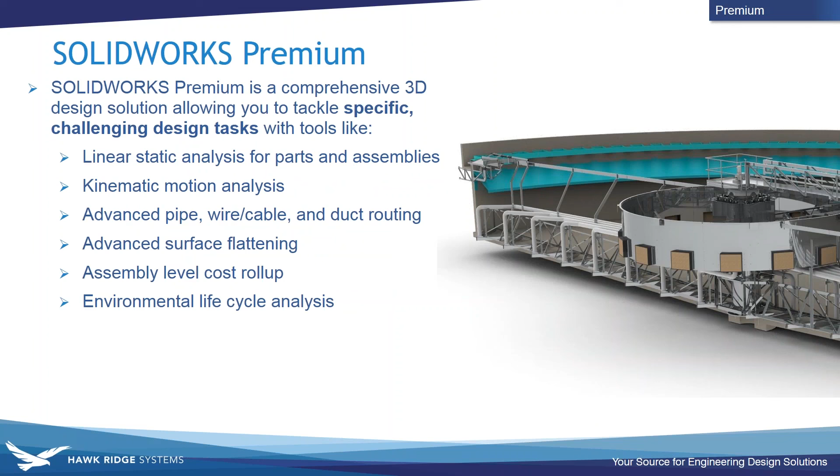Now with Premium, you get all that we just talked about plus this stuff. You get SOLIDWORKS Simulation, which allows you to do linear static stress. If you need more, it's available—it just depends on what environment and what kind of testing your product needs.

Not using time and money to create prototypes is huge for productivity, and that's what simulation helps you eliminate. Kinematics motion analysis too—for sourcing components, motors, and actuators, we can run these designs through their range of motion and see what forces are required.

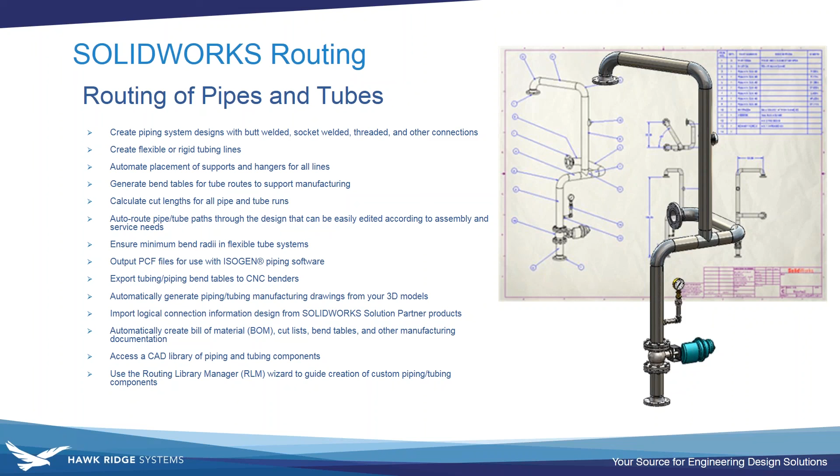Routing in this industry is mostly your electrical wiring, cabling, and harnessing, but it also does rigid piping. They're all similar—routed systems moving fluid, electricity, or something from one point to another. There's also flexible tubing, hosing, ducting, and cable management systems. It's all automated: you choose the cross section and function, point A to point B, and it's drawn and 3D modeled in your assembly, so your bill of materials is accurate. That's the key.

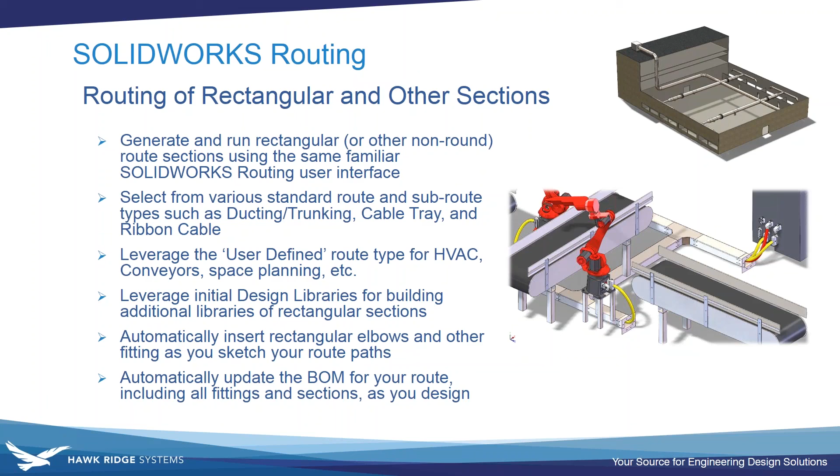Advanced surface flattening: if we're looking at graphics or textiles that flex or sit on complex surfaces, we need to flatten those difficult surfaces to see where compression and tension will be, get an idea of how we may relieve that, and get the flat shape that needs to be cut—which we can use to drive our CNC machines to cut those flat patterns. There's very high-end math involved in flattening these advanced complex surfaces.

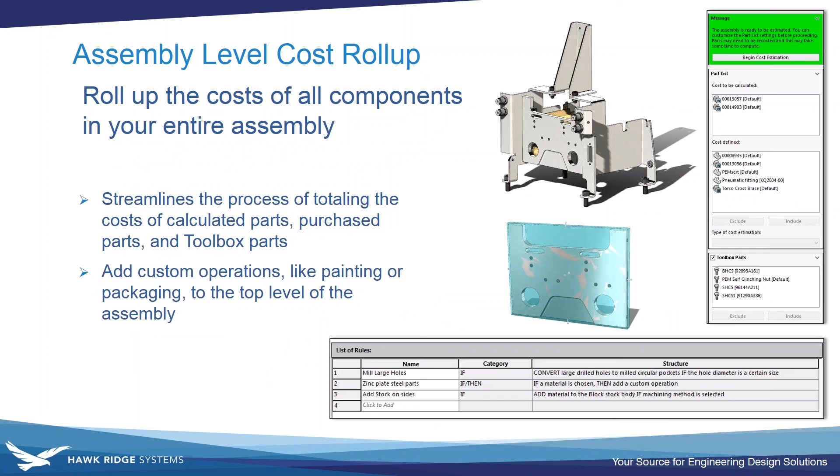Assembly level cost roll-up: we can do it part by part in Professional, but with SOLIDWORKS Premium it'll do an entire assembly in one shot and roll it all up to the top level, saving you even more time.

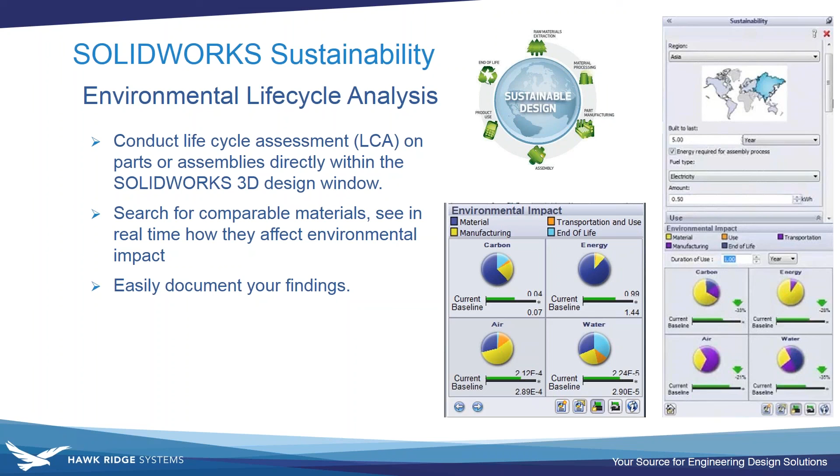And sustainability, as we mentioned, looks at material and manufacturing methods, transportation, how it's used, as well as end of life—what happens to it when it's done. That allows you to make decisions on those four aspects early on so you can reduce the impact on the environment.